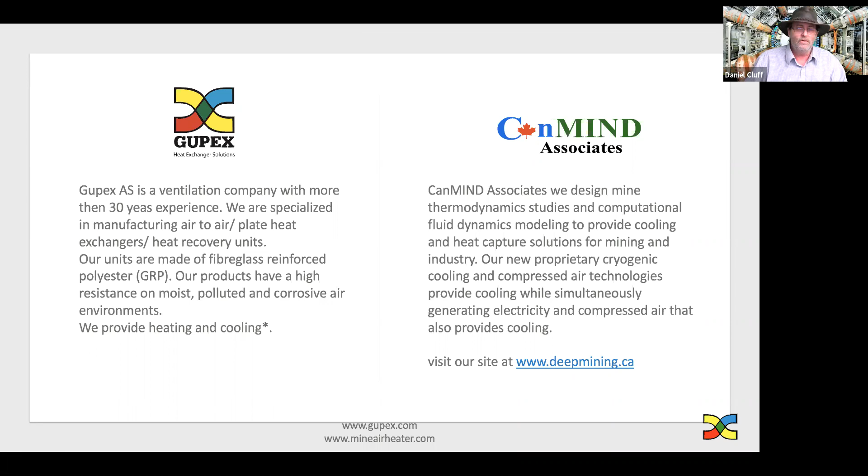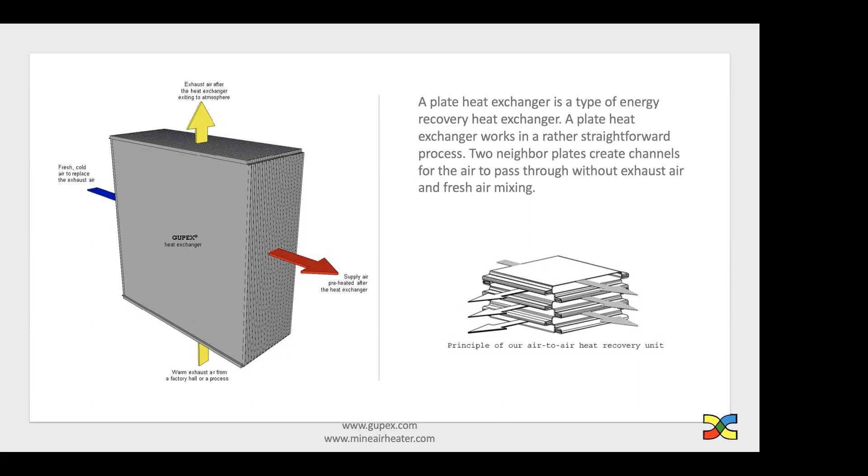We're going to talk, as I said, about other industries. And to begin with, Daniel's going to have a short presentation. How does this work in the mining industry?

Okay, thank you, Ellen. Well, you all know that the air coming up your upcast shaft has heat in it, especially in the wintertime. You heat the air before it goes down. So what we do is we capture the heat from that upcast shaft through this heat exchanger, and the fresh air coming in does not mix, and you take advantage of using that heat instead of propane, natural gas, or electricity in the wintertime to warm the air in the downcast shaft. We found that this can lead to substantial greenhouse gas savings, or just energy savings if it's electricity.

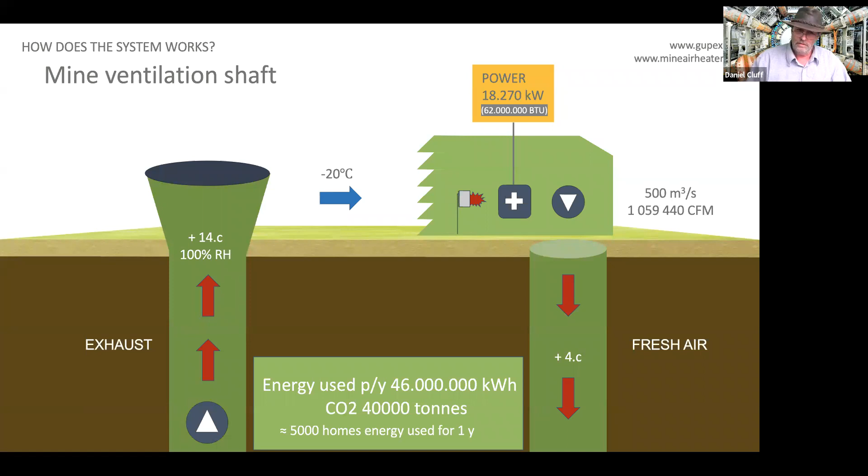And depending on the size of the project, there are different payback periods. But also in the summertime, we're integrating Ellen's system at Gupex into cooling. So in the summertime, we can use the exact same heat exchanger to provide air conditioning for the mine.

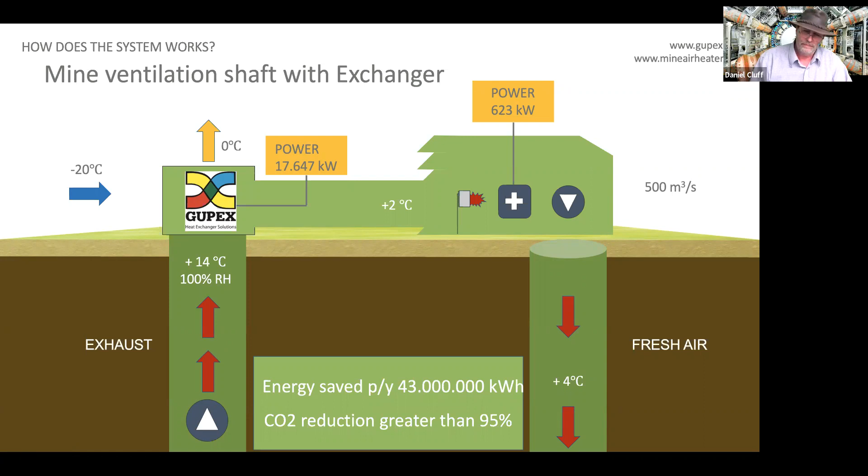So here, thank you, Daniel.

This is a little bit about the short benefits that our technology brings. First of all, and mainly, is the GHG emissions: there is no GHG-emitting heating system, and there are no mechanical moving parts, no maintenance. We have an efficiency of around 65%. This all improves your company's green profile.

It is extremely resistant to corrosion and acids because of the material it is made of. We also want to say that there's a low pressure drop through the heat exchanger. And it is self-cleaning, something that I will also explain in some of the pictures later on. We have some information here about the delivery time. This is one of the cases, mainly when it comes to mining, where we can promise to deliver.

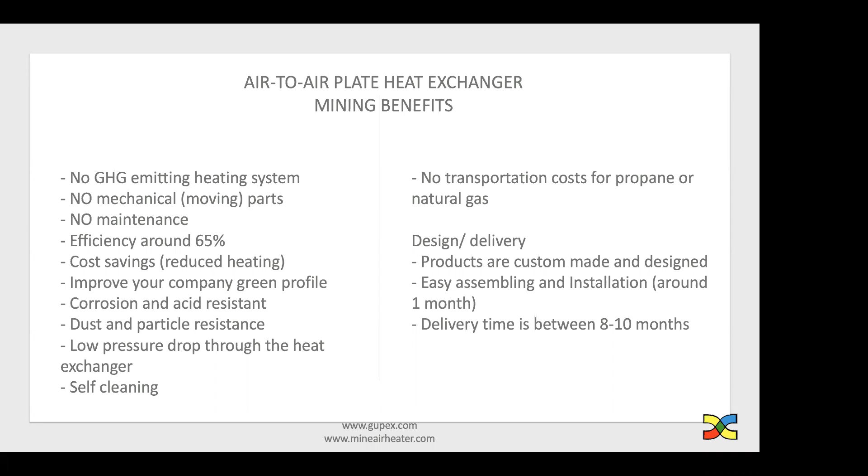Here is a great picture that I always like to have, because when it comes to investment, I can happily say that it is a great investment when it comes to durability and sustainability. This is one of the first units that we installed. It's been working and running for 30 years without maintenance. So you can see the first picture from 30 years ago, and this is how it is now.

The material: mainly we have the plate and we have the housing. The plate, as said, is glass fiber, and the gap between the plates is 15 millimeters. This gap provides a very great self-cleaning system, because when the heat exchanger is in use, it generates a lot of steam that converts to water, and this water runs through the plates and cleans them. So no particles, no clogging problems with the plates.

The housing is also made of glass fiber in a sandwich design, also resistant to corrosion, and also very light, so it's very good for transportation. And its insulation properties are the best you'll find in the market.

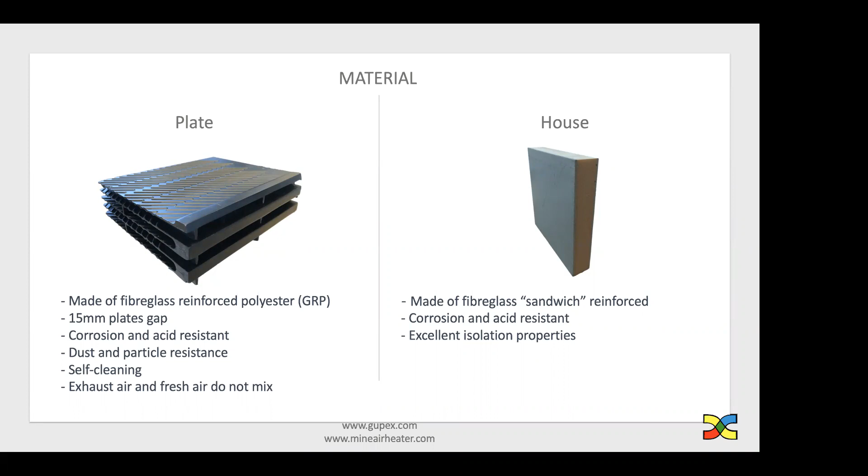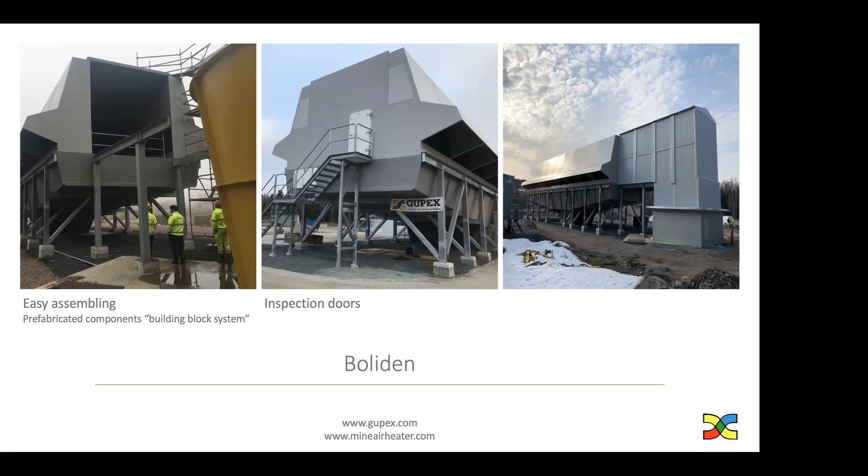Here are some of the projects we have delivered. Mining projects. Let's see, what's the next one? Yeah, we have delivered to Boliden. We can see it's quite easy to assemble. It's a solid construction that you can ship in boxes, and it is a Lego type of construction. We have the inspection doors, and here is another one.

This is Zinkgruvan. We actually have 3 that have been delivered there. Here you can see 2 of them, Thorax and Cecilia. Because we design, manufacture and build the product, we can suit the needs of every client. Mine sites tend to be unique, and the first one that you can see to your left is a construction that was built on top of a burning station. So we take into consideration adjusting to the needs of our clients.

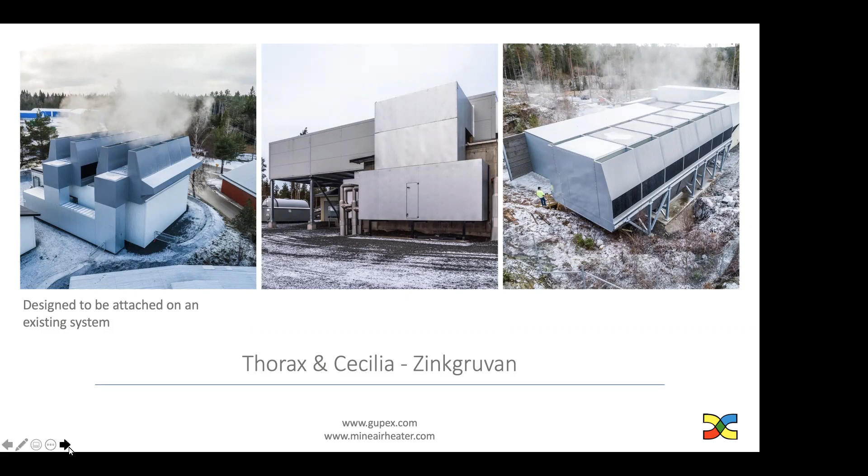If Daniel could talk a little bit about our payback time.

Okay. The payback periods, as Ellen said, each situation is unique. We just did a study for Lakeshore Gold, and their payback period based on propane consumption would be about 2 years. Historically, there were longer payback periods, but we think that's coming down a lot because costs are going up, but the cost of the systems isn't going up as much as energy.

So depending on your life of mine, once this is paid back, you're forever saving on all of those energy costs, which in the small cases were a couple of million dollars a year. Plus, you're going to be moving forward with all the greenhouse gas benefits. So you're not going to be paying for tons of carbon, and those prices are going to be going up. So moving forward, this saves you money, and the savings can actually increase over time.

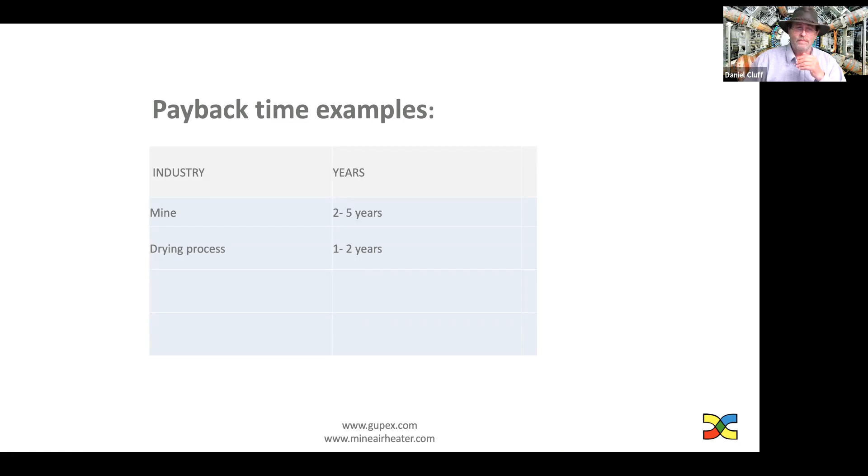Yeah, and just one extra thing: when it comes to the drying process, it depends as well. It can vary from 1 to 2 years depending on the temperature that we are talking about. It tends to have a very high temperature and humidity. If you're talking about 60 degrees or about 90 degrees, the payback time is going to vary.

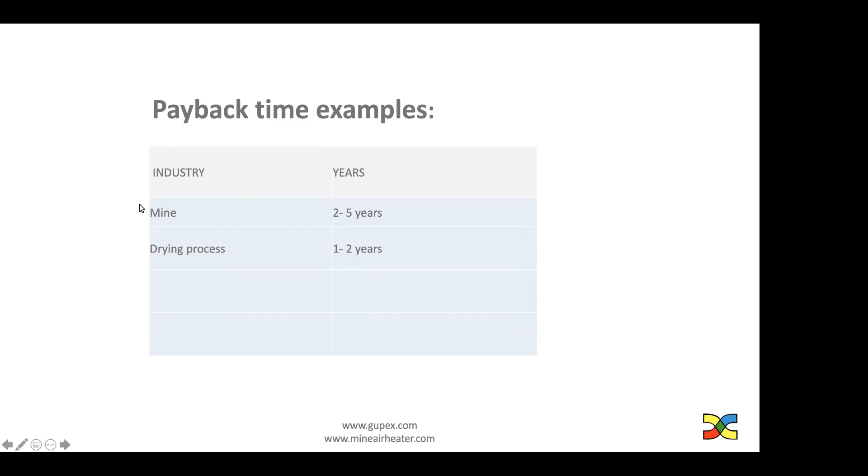Here, as I said, you have all the other types of industry, just to name a few. The list is not complete, but those are the industries that we have been working with and have succeeded in. I'm not going to go into specifically how it works, but these companies choose our product, when it comes to welding, metallurgy, and aluminum, pretty much because we are corrosion resistant and particle resistant. So there is no clogging on the unit.

Spray dryers as well, the same. Wind turbines, in the nacelle, it is very corrosive and humid, and there is the problem with salt most of the time, and it tends to be quite hot. So in this situation as well, and in the situation of some mines, we can provide cooling.

Electroplating industry and wood and food as well, because of the dust and humidity. And the farms also, because of all the particles that there are, and fishing as well because of the salt. So there are a lot of characteristics in our product that make it stand apart from all the others in the market. We could talk about this for a long time, but I'm gonna let you in here.

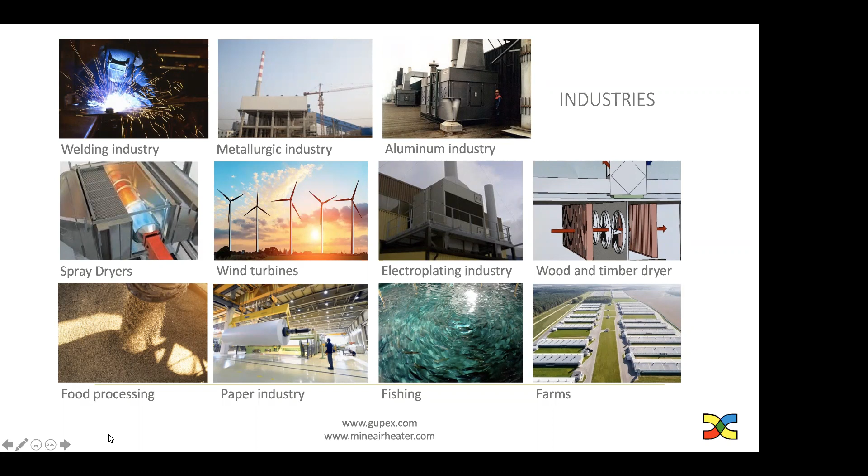Here is just another diagram about spray dryers, because we also have very good knowledge of this and we have delivered many of those. Here it is simple. The whole process happens pretty much as it does in mining. You take out the heat that tends to be extremely hot and humid, you go through the heat exchanger, and you reuse it. You can see the temperatures from 10 to 50, 90; it's just an overview of how it works.

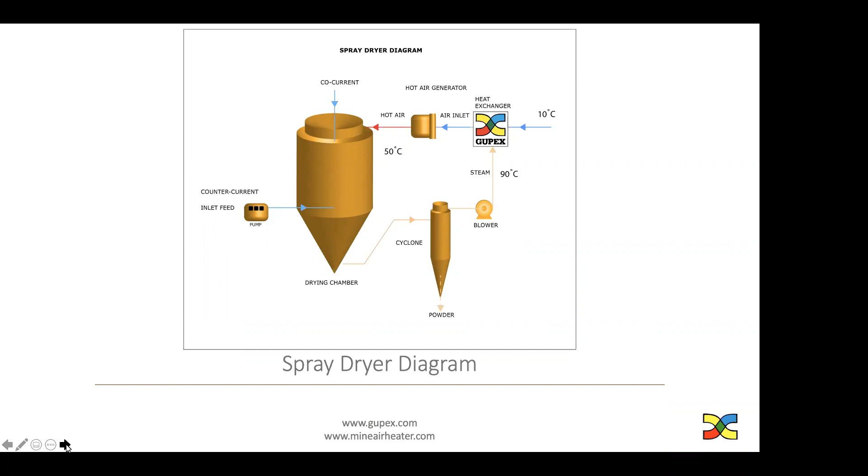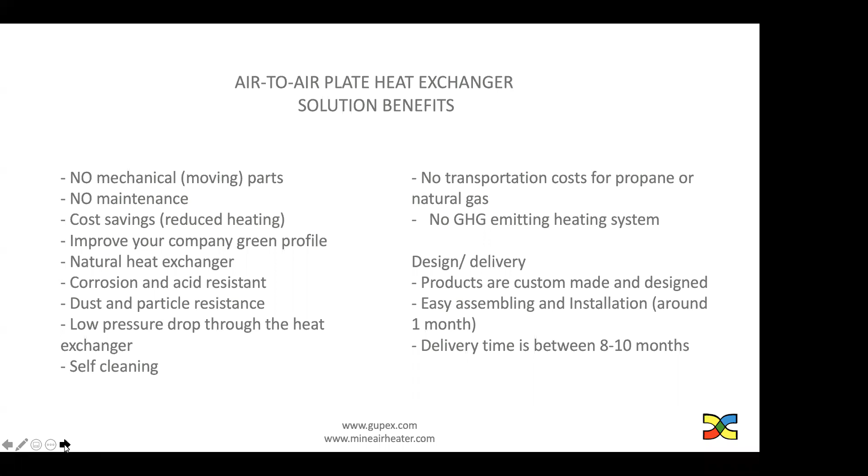Again, these are all the benefits of the solution we present to you today. Daniel, if you have something more that you would like to add, please do so. Okay.

Well, I guess there was a question about what happens to the heat, because it's already warmed up or something. So I'll go into that in a little more detail. First of all, you need to heat your downgoing air to somewhere around 2 to 4 degrees in the wintertime. So if the temperature is -10, you're heating the air to 2 to 4 degrees, and more and more heat is required as the temperature goes down. What we do is capture the air that's already coming out. So we're warming the air using the air that went through the mine.

First of all, you've got auto compression. If you go down 2,000 meters and heat the air up to 2 degrees at the top, by the time it gets to the bottom it's going to be 17 to 20 degrees C already. Then it goes through the mine, picks up any heat from operations or strata heat down there, and comes back up. On the way up it cools down a bit, the reverse process, but it also has humidity and it's warmer than when it started. So when we mix those two flows through the heat exchanger, only the heat transfers, none of the air mixes.

So in the end, you don't have to turn on your heaters until a much lower temperature, like below -20. The savings are everything you would have spent heating the air between 2 degrees C and -20, which turns out to be a lot, quite frankly. This is in the millions of dollars, depending on propane or natural gas, which is a lot cheaper. That also goes to the payback period. If you're using propane, which is sometimes 3 times the cost of natural gas, the payback period is smaller. If you're using natural gas, it takes a little longer to catch up. But once you do, you've got years and years of free energy that you're capturing from the mine and reusing. So I hope that clarifies that question.

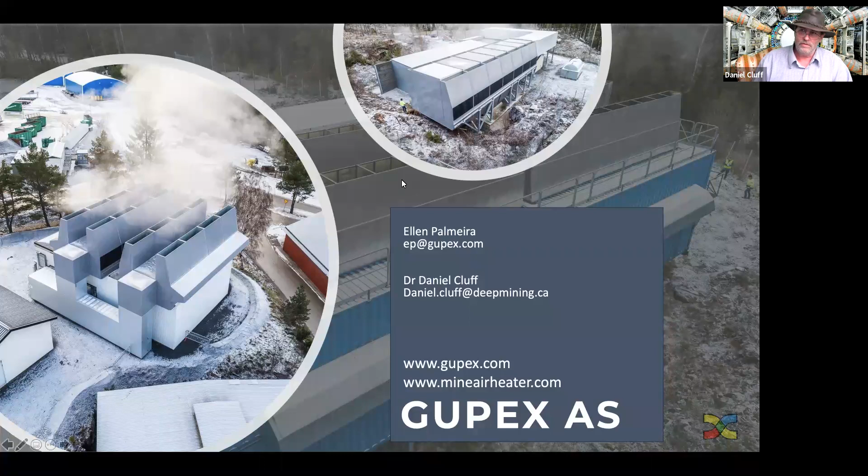It looks like we have time for more questions, and thank you for the answers so far. Question is, can you elaborate more on the carbon capture applications of this technology? Well, we're not doing that. We're stopping you from creating carbon. So if you have to heat the air on the intake, then you're burning propane or natural gas. So if you're not doing that, you're not creating carbon.

This just sits there. Once you install it, it just sits there and doesn't do anything except transfer heat. And we can transfer heat from all different sources and so on. So that's it. It's reducing your consumption on the site, and very substantially, I might add.